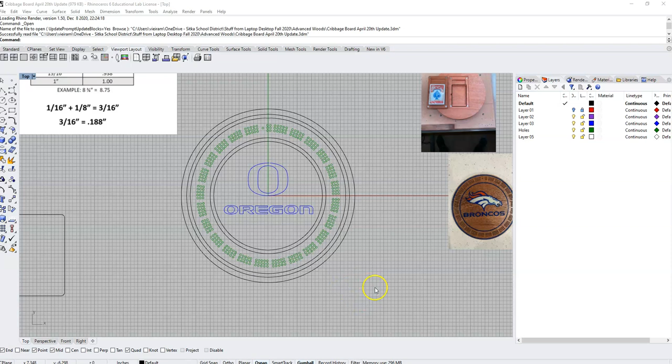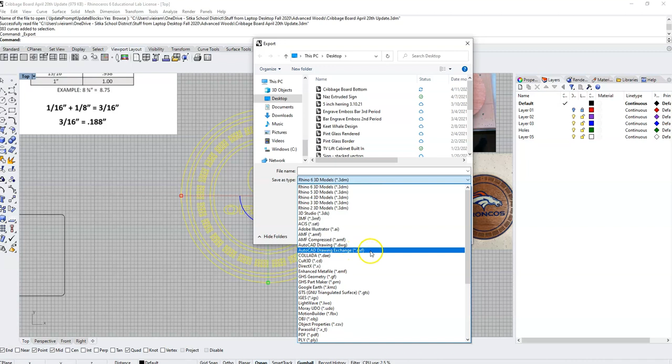So to start with your Rhino file open, now that we have everything on its own layer in the right place, we're going to draw a selection box around this. And with just these items selected, we're going to go to our File menu and select Export Selected. In this menu, we are going to select under the Save As Type pull-down menu, the AutoCAD Drawing Exchange .dxf file type. And I will name my file Cribbage Board Top Side Vectors. And I'll save that file.

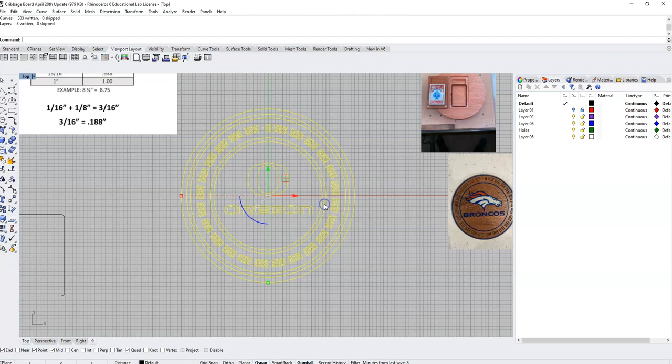You're going to say OK to any dialog boxes that pop up. And then you're going to open up the Aspire, Vectric Aspire software program that you will have downloaded and installed on your laptop. Once you open this up, we're going to click on this in the left-hand side that says Create a New File. And now we have to give this some information.

We're going to be doing a single-sided... we're going to do a double-sided, but we're going to set this up as two single-sided cuts. We're going to set up our job size, and we're going to set up our job size as 14 inches wide by 14 inches tall, with a thickness of 1 inch. We are going to zero our Z from the top of the surface, and we are going to set our zero at the center of our object. And we'll press OK.

At this point, we're going to go to the File menu. We're going to import vectors, and we're going to find the cribbage board topside vectors file that we just exported. And I'm going to press Open. And here are all the files, the vectors, that we have created in Rhino, now installed on Aspire.

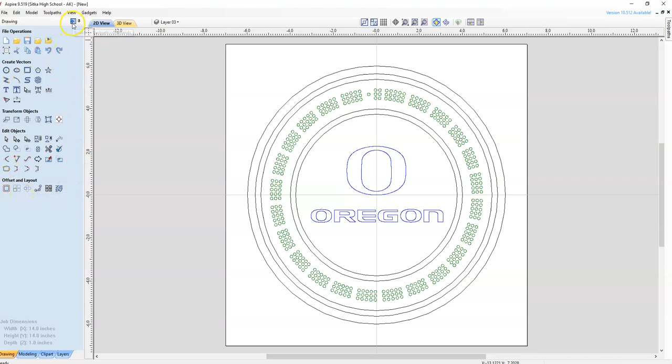At this point, we are going to set up a number of toolpaths. So this left-hand side has a drawing sidebar. If I click on this blue arrow right here, I can transition over to a sidebar on the right side, which is my Toolpath sidebar. So we're going to do a number of toolpaths here.

The first one is we're going to set this top side up, the outside vector, to do a profile toolpath, which means it's going to cut this out. So I'm going to click on this profile toolpath. I'm going to set my cut depth to 1.1 inches.

And I am going to select my tool, a 1/4 inch end mill. I'm going to select my pass depth to 0.125 inches, my spindle speed to 12,000, and I'm going to select inches per second. My feed rate is how fast my bit moves in the X and Y direction, and my plunge rate is how fast it moves in the Z. So I'm going to set those values to 3 and 2 and press OK.

I'm going to say down here that I want the bit to pass on the outside of the line. And I need to add some tabs. I'm going to click this box right here. I'm going to have a length of 0.5. And I'm going to set my thickness to 0.25, a 1/4 inch.

And I'm going to click on Edit Tabs. At this point, I can come out and I can click. And I can add tabs, which I'm going to do at these points on my circle, and I'll press Close.

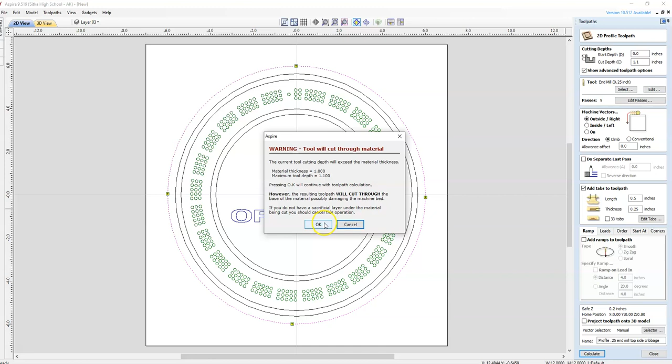You'll get a warning that says it's going to cut through your material, which is fine because that's what we want. I'll press OK. At this point I can select my toolpath and say Preview Selected Toolpath. You'll see it's going to cut through that circle and leave 4 tabs so the circle doesn't fly off the table after it's done being cut. I'll click Close.

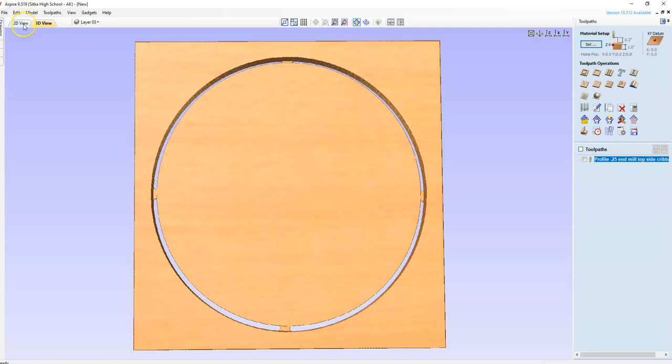At this point I can click on my 2D View tab and come back. Now I'm going to select my vectors for my design, selecting all of these. If I type the G key, they will group together.

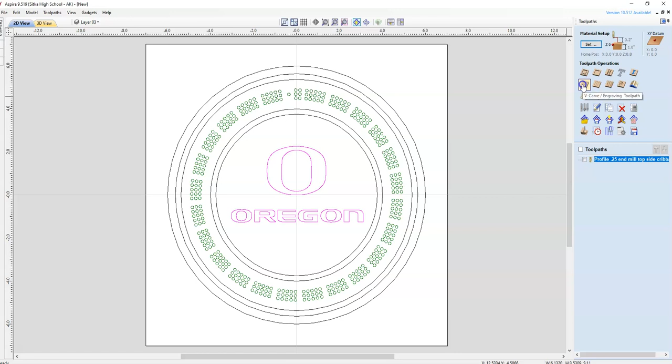These I'm going to V-carve, so I'll select this V-carve option. I'll do a start depth of 0, and for my flat depth I'll put in 0.15 inches. For my tool, I'll select a V-bit, a 90-degree 0.5 inch V-bit. I'll select inches per second, 3 and 2. And I'll press OK.

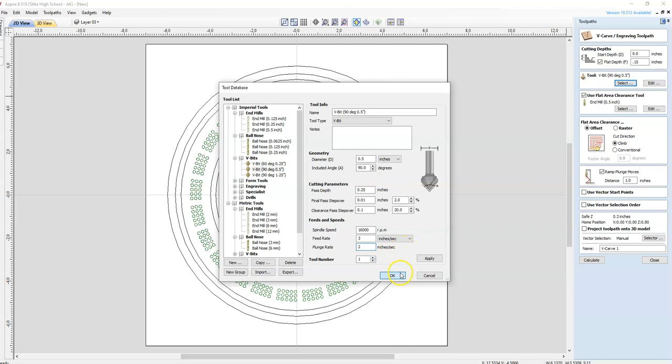I'll type a name for this as Cribbage board top V-carve logo 0.5 90. I always like to put the bit I'm using in the name of the toolpath. And I'll calculate that toolpath.

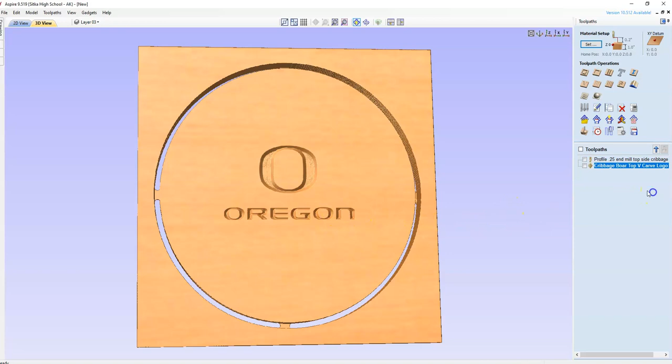I'm going to preview all the toolpaths now, and you'll see I have my design carved out. I'll close that and come back. Now I'm going to select these vectors that we are going to pocket to fill with epoxy.

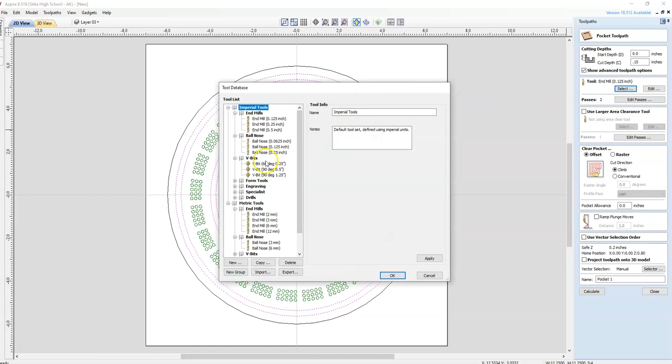So I'm going to come to my pocket toolpath right here. I'll give them a depth again of 0.15, and select a 1/4 inch end mill. Say OK.

I'll click this box that says ramp my plunge moves by 1 inch. I'm going to call these epoxy inlay circles pocket 0.25 end mill. Calculate. And now I can preview all of the toolpaths, and you'll see I've got those rings now pocketed out.

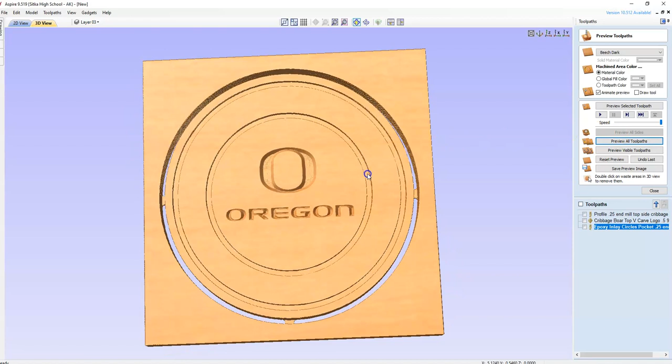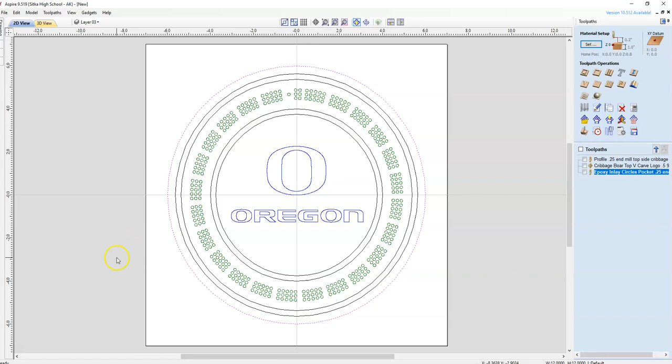So all that I have left are the circles for the pegs. At this point I'm going to select these circles. In order to select all of these circles for the peg holes, I'm going to come up to my Layers tab. I'll turn off my blue layer and turn off my default layer, and now all that's left are these peg holes.

So now I can draw a selection box around these. Again, if I type the G key on my keyboard, these will all become grouped, and I can click off and click back on, and they're all one object.

So now back in my toolpaths, I'm going to pocket these. We're going to cut these to a depth of 0.5 inches, a 1/2 inch. We're going to use a 0.125 inch end mill. And we'll set our inches per second to 3 and 2. And press OK.

Click the ramp plunge moves. I'm going to type in a name of peg holes, pocket 0.125 inch end mill, and calculate.

And now I will preview all, and you will see we have all of our peg holes created.

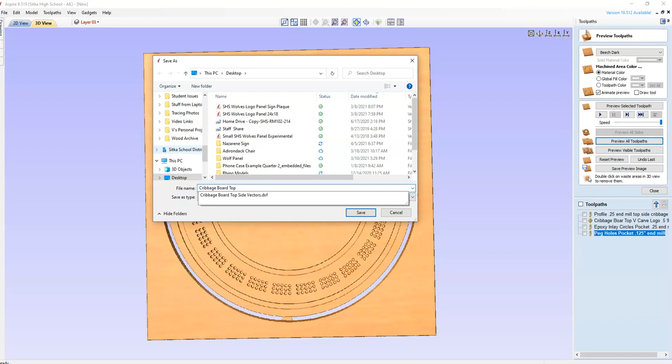At this point you're going to come and save your file as cribbage board top, and save that file. Next, we will move on to the bottom side of your cribbage board.